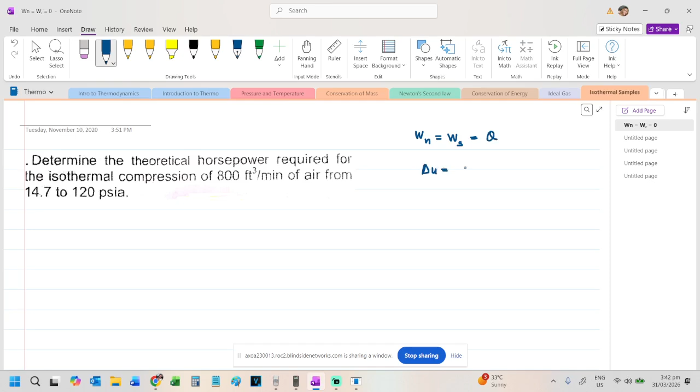Okay, so let's proceed with isothermal process where the temperature is constant. Okay? So, ang work non-flow natin dito is the same with the work steady flow and then Q. Pare-parehas yan. Ito ang pinakamadali na process ng inyong thermodynamics. So, yung work non-flow is equal to work steady flow that is also equal to Q. Yung inyong delta U is, since wala ka ditong change in temperature, no delta T, so 0 yan. Also, 0 rin yung inyong delta H.

Okay? So, pwede mong sabihin that your Q is equal to P1 V1 ln of your V2 over V1. Yan, pwede yan. Or your pressure, same lang yan. Pwede mo rin tong gawing, kasi ito ay PV, di ba? Pwede ring MRT ln ng V2 over V1. So, yung delta S mo dito will be equal to MR. Wala kang temperature. So, ln ng V2 over V1.

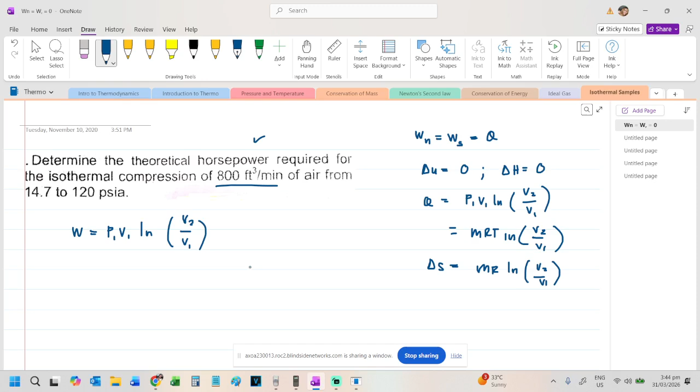Okay? So, for number 1, you determine the theoretical horsepower required for the isothermal compression of 800 cubic feet per minute of air from 14.7 PSI to 120 PSI. So, ang sabi dyan, theoretical horsepower. So, work is P1 V1 ln ng V2 over V1. Di ba tayo ay constant temperature, P1 V1 over T1 equal to P2 V2 over T2. That is cancelable yung T that is constant. Now, V2 over V1, cross multiply natin, is equal to P1 over P2.

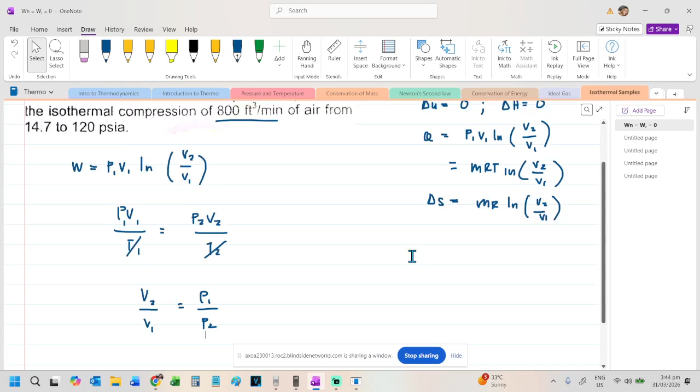So, yung work natin, our P1 is 14.7 pound per inch squared multiplied to 144 inch squared per feet squared. Ito yung pressure. Yung volume naman natin, 800 feet cube per minute. Tapos, i-multiply natin ng ln of the pressures, 14.7 over 120. Kailangan daw theoretical horsepower. Ano ba yung kakancel natin dito? Yung inch squared, feet, minute. Meron tayong 33,000 feet-pound per minute in every horsepower. So, canceling all same units, lalabas is HP.

So, our answer using our calculator: 14.7 multiplied to 144 multiplied to 800, tapos divide natin ng 33,000, and then multiply natin ng ln ng 14.7 divide by 120. I think this will be negative because the work is done on the system. So this is negative 107.75 HP. Next item.

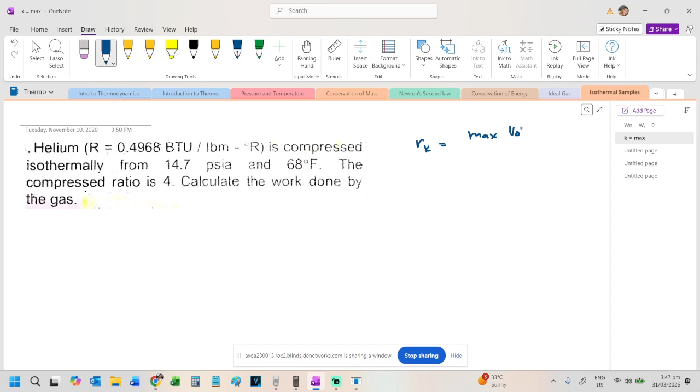Helium is compressed isothermally from 14.7 psi and 68 degrees Fahrenheit. Now, ano ang compression ratio dyan? Compression ratio is rk, that is V2 over V1? Actually not. Mali ito. The compression ratio is maximum volume over minimum volume. So, ang rk natin dito is 4, V1 over V2. And nakalagay on your work is P1 V1 ln ng V2 over V1. So, this is reciprocal.

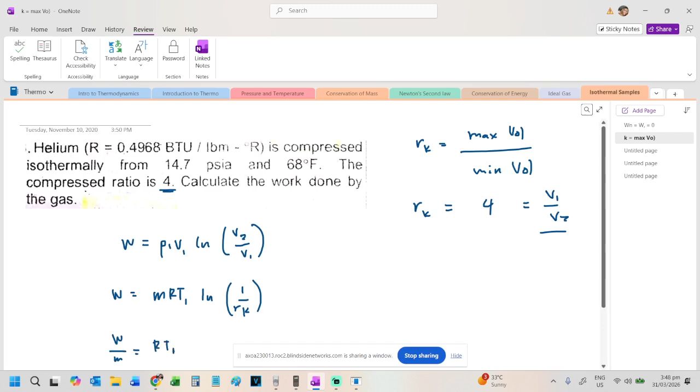So, P1 natin is 14.7 pound per inch squared, 144 inch squared per feet squared. Tapos yung volume natin, ano ba binigay dito? Hindi pwede. No problem. Yung P1 V1 natin pwedeng i-change ng MRT1 ln ng 1 over rk. So, wala tayong mass na binigay dito. So, specific work lang to, work over mass, RT1.

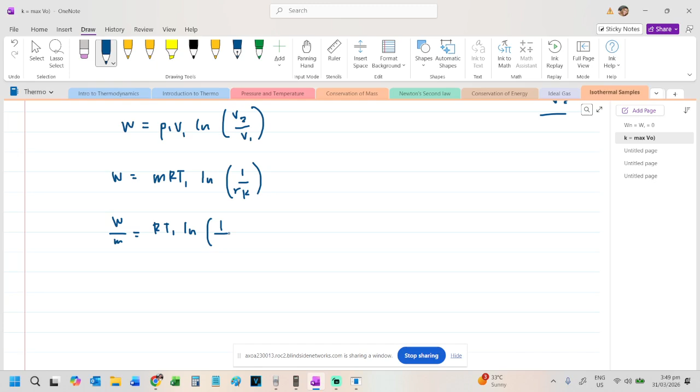Okay, RT1 ln of 1 over rk, because of the compression ratio. So, our R is 0.4968. It's given there in BTU per pound degree Rankine. Then our temperature should be in absolute form, so 68 plus 460 degrees Rankine. Then ln of 1 over 4. Okay? Let's substitute. Let's use our Casio.

So, 0.4968 multiply to 68 plus 460. Okay? ln of 0.25. So, the answer is negative again. Negative 363.64 BTU. That is the answer.

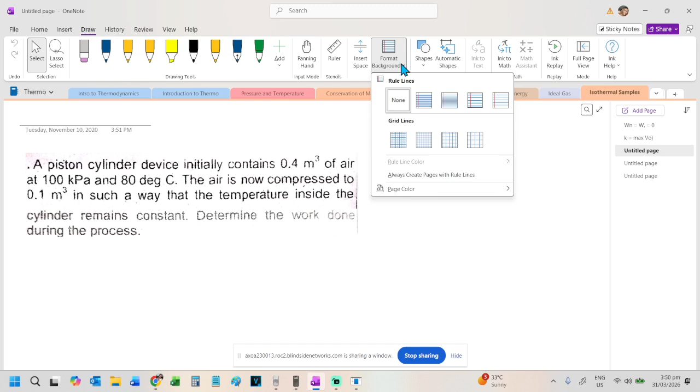So, next problem, number 3. Isothermal is easy. A piston cylinder device initially contains 0.4 cubic meter of air at 100 kilopascal. Its temperature is 80 degrees Celsius. The air is now compressed isothermally to 0.1 cubic meter in such a way that temperature inside the cylinder remains constant. You determine the work done. So, again, work done. That's the only question in isothermal.

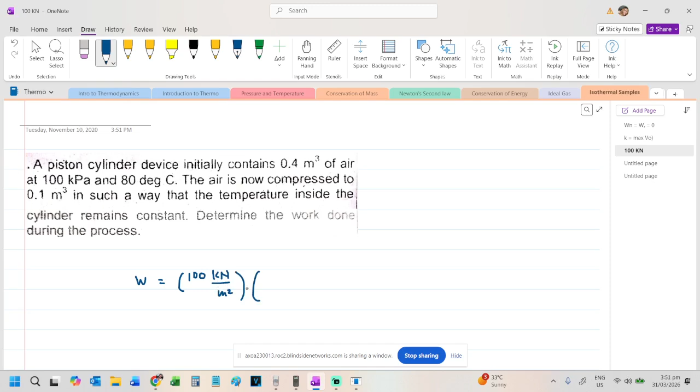So, the work done, you have pressure, 100 kilonewton per meter squared. The volume is 0.4 cubic meter. ln of volume 2, so 0.1 cubic meter over 0.4 cubic meter. So, this will become a negative value again. Pressing that on the calculator. So, 100. The result is kilonewton meter, that's kilojoules.

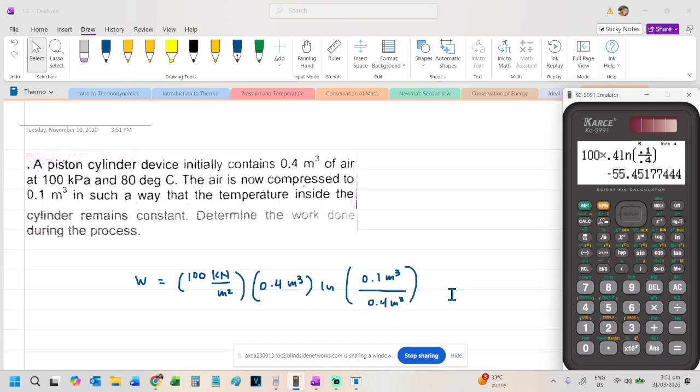100 times 0.4, ln of 0.1 on top, 0.4. Right? So, the answer is negative 55.45 kilojoule. That is the answer.

Next problem. Air flows steadily through an engine at constant temperature of 400 K. Find the work per kilogram if the exit pressure is 1/3 of the inlet pressure. Okay? So, a pressure ratio was given, P2 over P1, that is 1/3. Okay? So, let's solve.

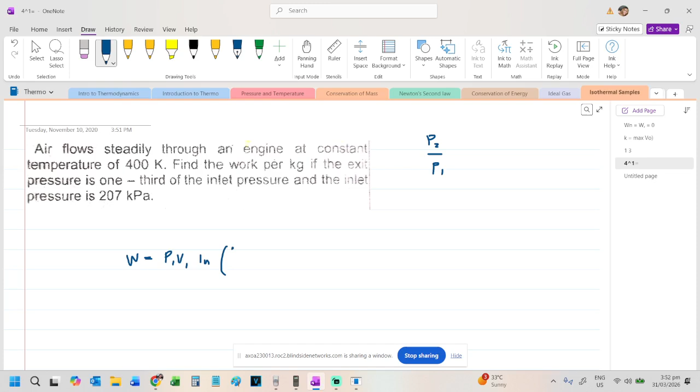Work can be P1 V1 ln of the ratio, V2 over V1. Or it can also be MRT ln of pressure 1 over pressure 2. Okay? It says the exit pressure is 1/3 of that. So, 1/3, and the reciprocal will be 1 over 1/3. So, M is known. So, W over M.

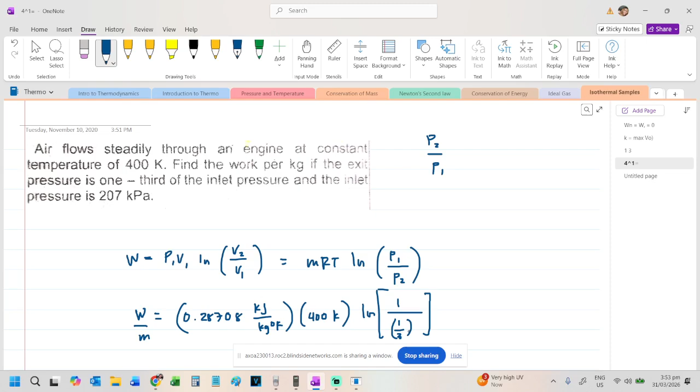Our R is for air, 0.28708 kilojoule per kilogram degrees Kelvin. Then the temperature is 400 K. ln of 1 over 1 over 3. The bottom becomes reciprocal. So, the answer, using our calculator, the Canon. This is 0.28708. Sorry, I mixed up the calculators I use.

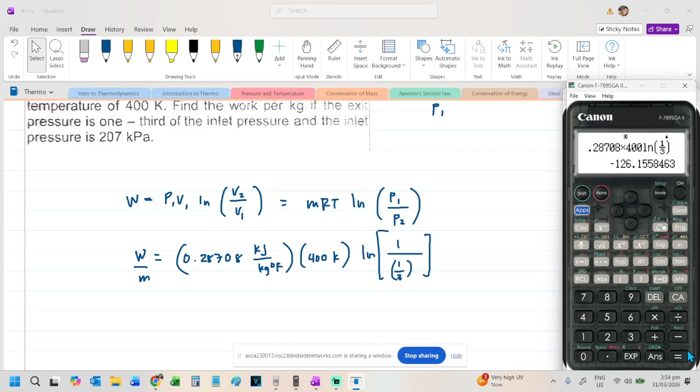So, 0.28708 times 400. Then, ln of 1 over 1/3, because its reciprocal is at the bottom. This would be negative if the denominator were higher than the numerator. So, this is 126.16 kilojoule per kilogram.

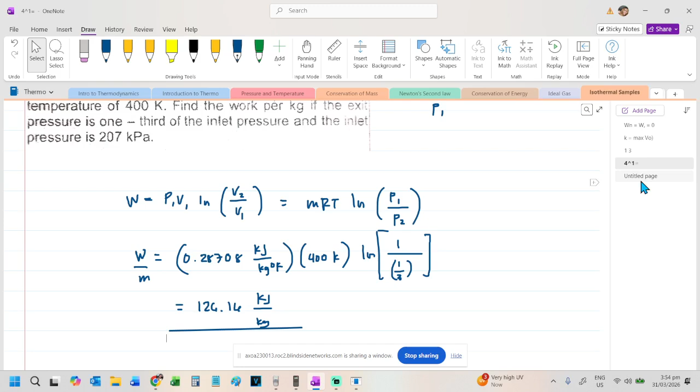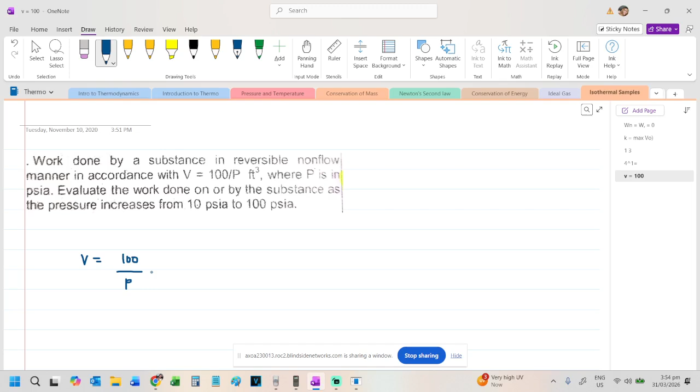Next problem. The work done by a substance in reversible non-flow manner in accordance with the following, where P is in PSIA. You evaluate the work done on the substance as the pressure increases from 10 PSIA to 100 PSIA. So, it says V is equal to 100 over P, cubic foot. Now, you were given P1.

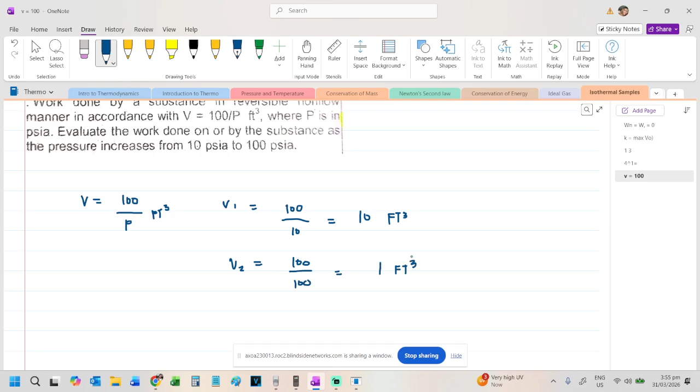Okay? So, V1 is 100 over 10. So, how much is that? 10 cubic foot. Your V2 is 100 divided by 100, so this is just 1 cubic foot. Okay? So, let's solve with our units. W is equal to P1 V1 ln of the ratio.

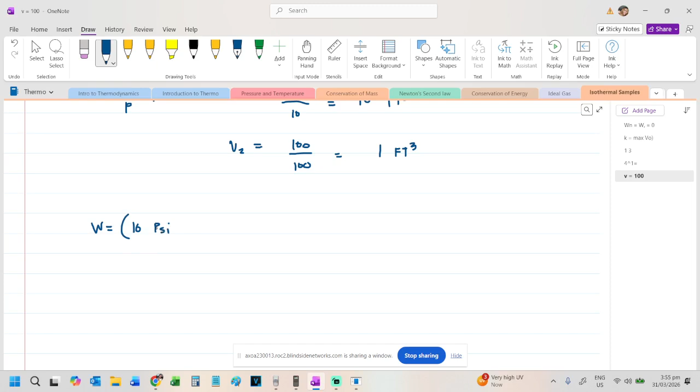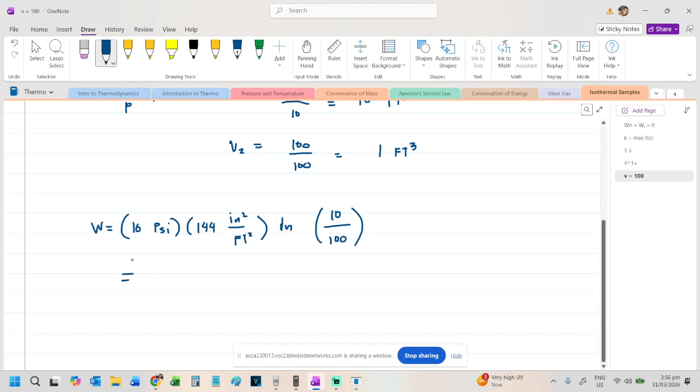So, 10 PSI, its pressure, times 144 inch squared per feet squared. Then ln of 10 over 100. That's just a ratio. So, solving, the result should be in pound foot. So, this is 10 multiply to 144, ln of 10 over 100, so 1 over 10 or 0.1.

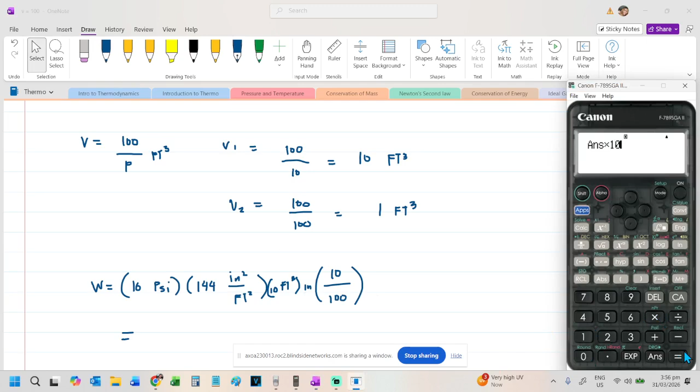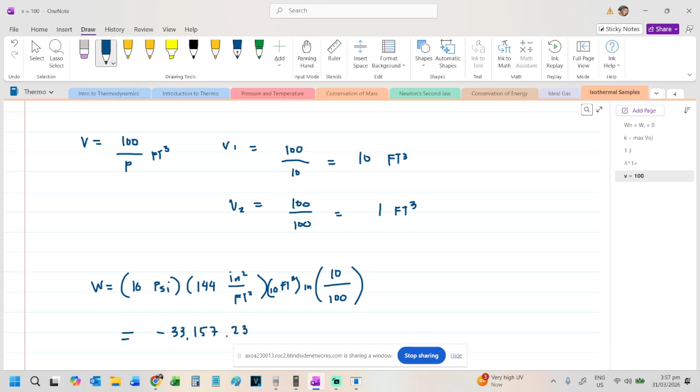So, the answer is... there's still volume. By the way, we don't have the volume yet. So, the volume will be 10 cubic foot. Multiply to 10. Sorry, not here. It's here, times 10. So, negative 33,157.23 pound feet. So, that is the answer for your number 5.